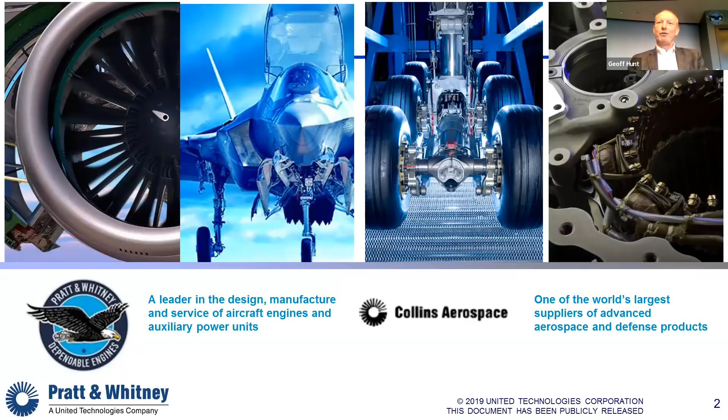Pratt & Whitney and the newly formed Collins Aerospace are the aerospace divisions of United Technologies. While Collins is a leader in the supply of airplane systems, Pratt & Whitney has been in the business of aerospace propulsion for the past 93 years. Within our military engine business, we design and manufacture high thrust-to-weight engines for aircraft such as the F-15, F-16, F-22, and of course the F-135 engine for the Joint Strike Fighter. In our commercial engine business, we power many of the large commercial aircraft that you might fly on today, and in the past decade we revolutionized commercial flight with our geared turbofan series of engines, which I'll touch on more later. Finally, our Pratt & Whitney Canada business powers many of the general aviation and business aircraft in service today, with engines such as the PT6, the gold standard for turboprop engines under 2,000 horsepower.

Before I get into my talk, I'd like to show you a short video by way of introduction to Pratt & Whitney.

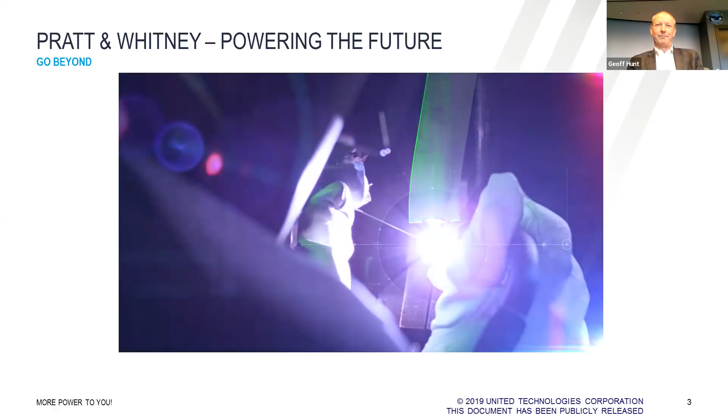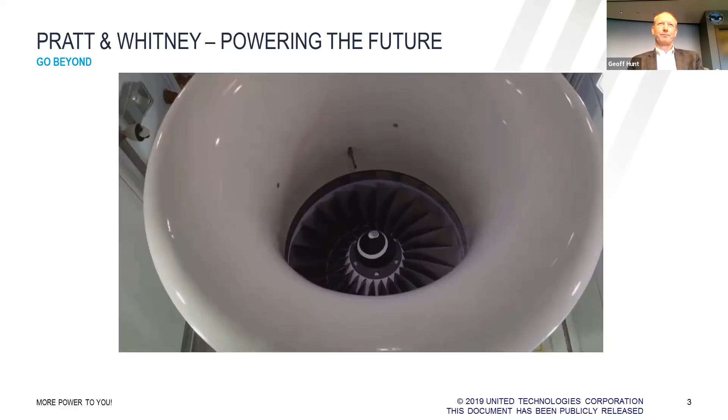For human progress. An instrument to rise above boundaries, connect people, grow economies, and protect the world. Together with our partners, we work with an explorer's heart and a perfectionist's grit to advance it. The magnitude of flight both humbles and motivates us. It demands vision and relentless attention to detail, requires dependable teams that deliver the highest quality products and services, and empowered people willing to do the right thing in the best interest of our customers. Every day, we rise to that challenge with state-of-the-art engines that carry people reliably to their destinations, service experts who provide the care and intelligence to keep planes flying, and generations of innovators working together to transform aviation. We love what we do because we believe flight unleashes the world to go beyond.

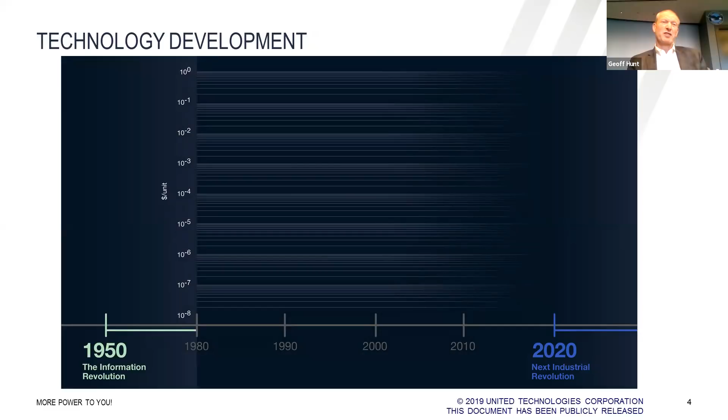Before I get into the details of propulsion development, let's look at it in the context of technology as a whole. First, let's look at some technology curves. What you have here is a log-linear plot with a logarithmic y-axis on the left and a linear time axis. So these curves will look linear, but are actually exponential technology curves.

Let's look at jet engines first. On the time scale that we have here, it's basically flat. One way to describe the slope of these curves is through doubling times.

Now let's look at some other mechanical type products. Rooftop HVAC units, a little steeper but also pretty flat, have a cost performance doubling time of around 25 to 30 years. Shifting products again, for elevator coated steel belts, we're looking at 15 to 20 years doubling time for the tech curve.

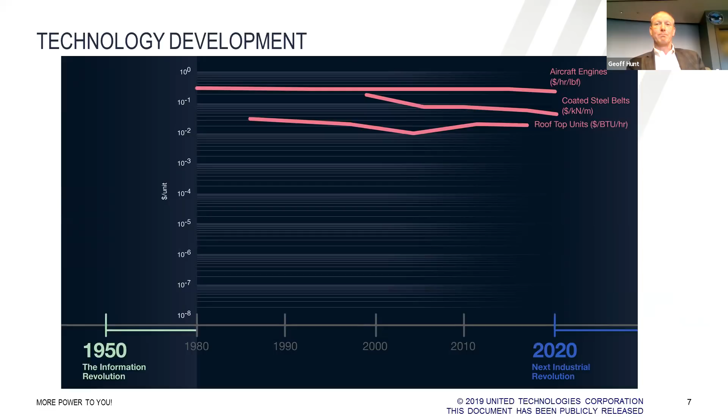So the bottom line is that these mechanically based technologies are relatively slow moving, driven mainly by improvements in materials. Increasingly, however, we see the intersection of these mechanical technologies with a landscape that is much, much faster moving. Digital technologies, and these are all hardware, not software, all evolve at approximately the pace set out by the famous Moore's law, a doubling time of every 18 to 24 months.

Electrical technologies are also interesting. I think these are also fairly slow in their pace of evolution. Recently, however, there's been a huge influx of investment from consumer devices and automotive into electrical technologies, and so the doubling time for battery technology is around 5 years.

And lastly, if you look at some of the advanced manufacturing technologies like additive and synthetic biology, while slower than their digital counterparts, they're still faster than what we are used to in the propulsion space. I'll come back to talk about how some of these intersections are disrupting our industry, but first let's go back in time and look at some of the key disruptors over the past century.

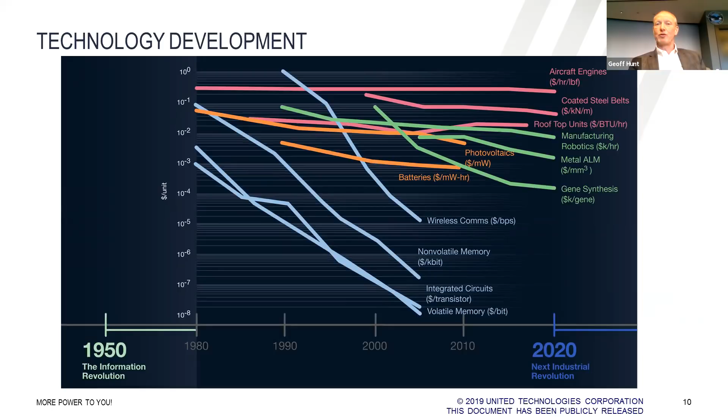Disruption is not new to our industry. The propulsion business 100 years ago was largely based on water-cooled radial engines at about 300 shaft horsepower. As we moved into the 20s, we saw engines such as the Pratt Whitney Wasp introduce air cooling to the radial piston engine, enabling a step change in thrust-to-weight ratio.

The variable pitch propeller was a concept that many had studied since the first airships, but it was developments in hydraulic actuation that made it practical in the 1930s, dramatically changing the takeoff and climb characteristics of engines. The jet engine, in development in the 1930s, was first introduced in the 40s in aircraft such as the Messerschmitt 262 and the Gloster Meteor, and again enabled a whole new approach to aircraft design in terms of speed and range.

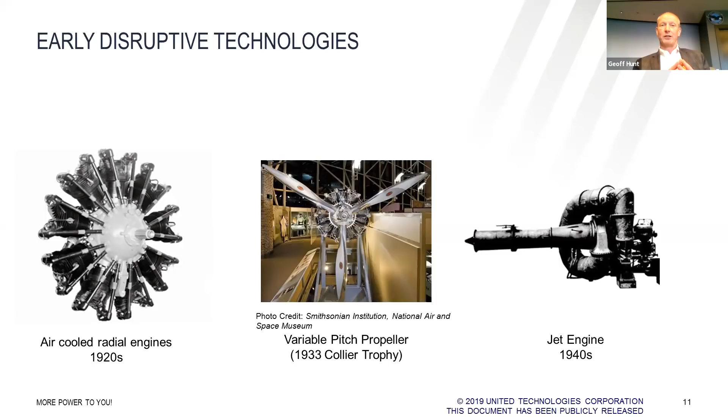Picking up from the evolution or the introduction of the jet engine, this chart shows how technology subsequently progressed within the large commercial engine market. Picking up from that pre-war single shaft jet engine, you see we have the ability to step up gas turbine efficiency by about 10% every decade or two, with step changes in engine architecture, and then periods of incremental improvement in between.

In the 1960s, we saw the wide application of dual spool jet engines like the J57, allowing a more efficient way to achieve higher operating pressure ratios. Then in the 1970s, structural, aerodynamic, and materials breakthroughs led to the high bypass ratio engines that powered wide-body aircraft such as the 747 and Lockheed TriStar.

And more recently still, we've seen bypass ratio double from 6-to-1 to 12-to-1, bypass ratio being the ratio of the fan to the core of an engine, again driving tremendous efficiency improvements. It all amounts to that doubling in technology in half a century.

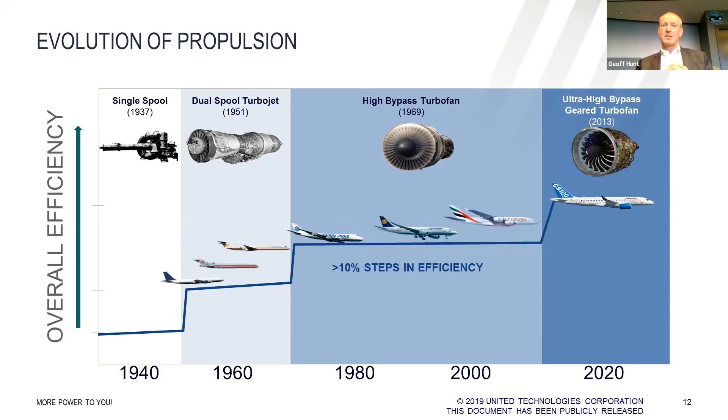We define the aero propulsion market to include commercial and military aircraft, helicopters, business and regional aviation, agriculture and general aviation, UAVs, auxiliary power units, and a range of turboprop applications. And of course, today we look increasingly at the personal taxi space.

The design drivers associated with these applications vary considerably. I make this point to emphasize the importance of really understanding the mission and market demands that must guide your thinking in the selection and development of propulsion architectures and the wide range of areas where disruption can play out.

For example, looking at a sample list of design drivers, a military jet will demand high thrust-to-weight, high operating pressure ratio, and low observability. Whereas a large commercial engine might put priority on fuel burn, noise, and emissions. And a short-haul commercial aircraft will live or die based on the reliability with which it can hit its turnaround windows. Of course, in all cases, safety and cost are critical, but how that is achieved for a given duty cycle may vary.

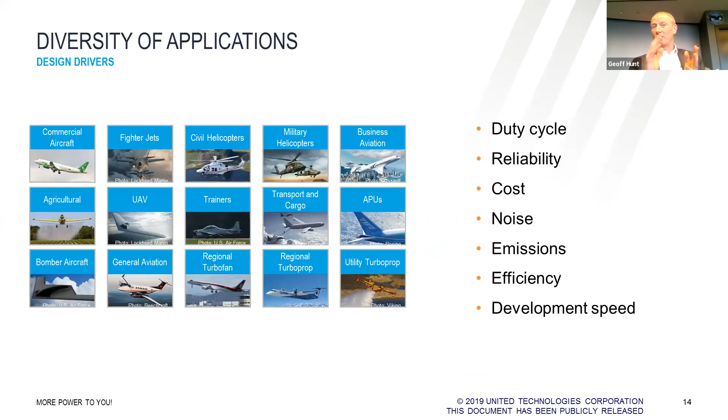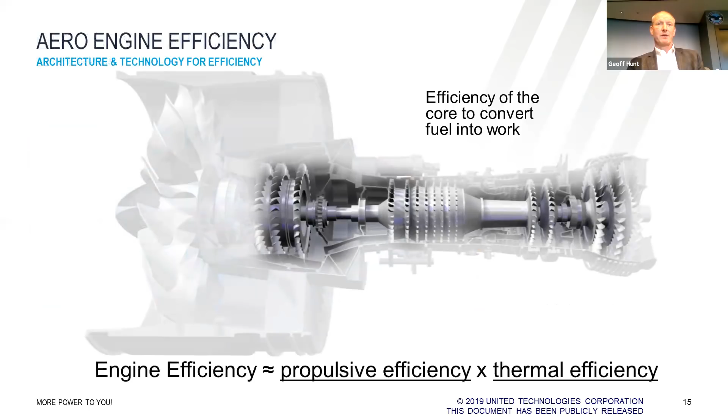So let's dig in a little bit to how we go after some of these design drivers with our technology planning, starting with efficiency. When it comes to engines, there are two areas in which we focus: thermal efficiency, the efficiency with which we convert the energy in fuel into useful work, and propulsive efficiency, the efficiency with which we use that work to produce thrust.

Over recent decades, much of the focus in the area of propulsive efficiency has been around fan aerodynamics and increasing bypass ratio. But the most recent commercial engines from Pratt Whitney have seen a significant improvement in this area through the introduction of a gear between the fan and the turbine, the so-called geared turbofan.

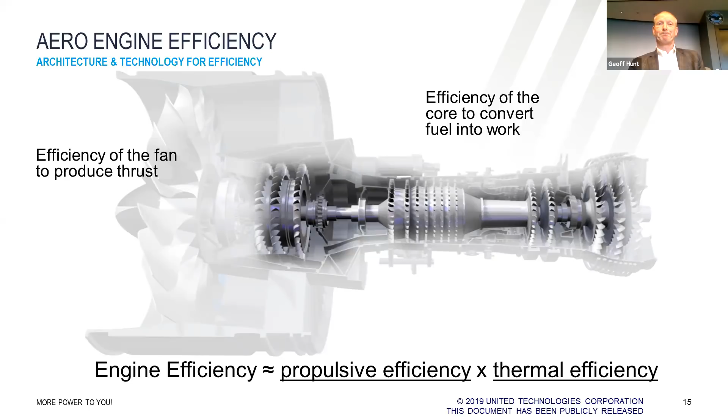Pratt Whitney invested billions of dollars in the development of this technology, which changes the architecture of a conventional turbofan engine by introducing this gear between the low-pressure turbine and the fan. In a conventional engine, the turbine drives the fan on a common shaft, and so they, by definition, rotate at the same speed. However, for optimum efficiency, the fan will typically want to run slower than the turbine, and so by introducing a gear, you can rebalance the core and achieve much higher efficiency levels.

This is easier said than done, hence the investment levels, but the prize is huge. As you can see from the chart, over the past decade, we've seen improvements of 16% of fuel burn, and I can tell you from experience, if you go back over my experience in this industry, in 30 years, we would eke out 2%, 3%, 4% would be a tremendous achievement. 16% is truly revolutionary here.

Dramatic reductions in carbon dioxide and NOx, footprint for noise reduced by over 70%, and as you'll see, 1.5 million annual cost savings per aircraft, and that's a combination of lower maintenance costs and the fuel burn that's involved.

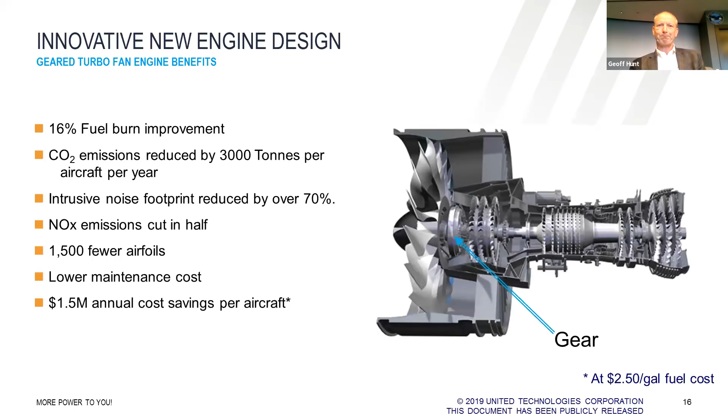So as I said, the other part of the equation is thermal efficiency, which largely comes down to how high a pressure ratio you can drive through the core. Driving pressure ratios in the core of the order of 30:1 within an acceptable core package is a challenge aerodynamically, structurally, and thermally.

But it's in the development of materials, design, and cooling systems to handle this challenge that demands real technology development. As illustrated here, we're talking about temperatures sufficient to melt rock or steel and loads equivalent to hanging an airplane off a single blade. And as we drive for ever improved thermal efficiency, these challenges go up.

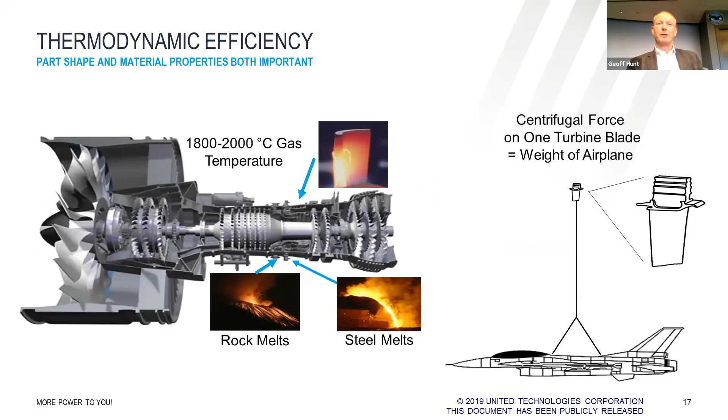You could look at the challenge as the application of three levers: development of ever more capable materials, the process through which those materials are produced, and the design of the cooling systems and coatings to provide additional capability.

This chart gives some insight into how we think about materials. The first jet engines ran at a peak temperature of around 1200 degrees Fahrenheit. They had aluminum alloy compressors and stainless steel turbines. The development of nickel alloys allowed temperatures to increase, and a series of important breakthroughs have pushed today's engines up into the 1800-2000 Celsius range.

You'll see in the center of this graphic how the nickel alloy section moves from forgings to castings and starts to neck down towards the higher temperature ranges. And this has been achieved by these progressive improvements, things like managing the grain characteristics of the alloys through directional solidification, and then single crystal materials to ensure capability. Cooling schemes, including ever more sophisticated film cooling, increase capability further. And then the application of thermal barrier coatings gets you to the very highest temperature capabilities with that type of material.

The latest developments, which are moving the state of the art into a whole new arena, is the application of ceramic matrix composites for the highest temperature areas of the engines. You can see from the curve that this is really getting you into this whole new space.

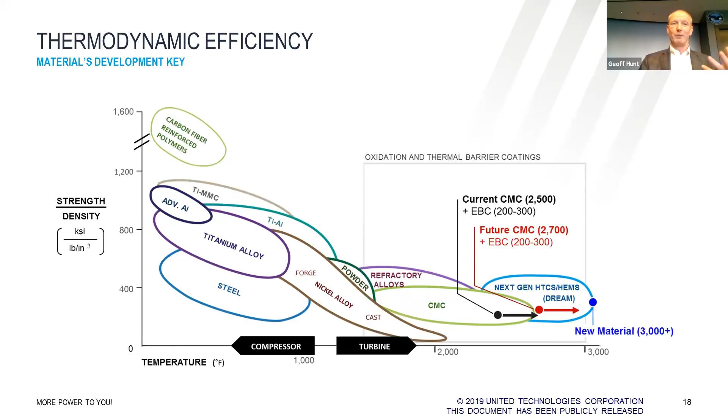So that's efficiency, propulsive efficiency, thermodynamic efficiency, and we're seeing progressive evolution followed by steps of disruption as we introduce new mechanical and thermodynamic concepts.

Shifting now a little bit to cost and speed. It almost goes without saying that cost and development speed are key drivers in our industry. And while there are many levers that one can look to, the rapidly evolving field of additive manufacturing presents some of the more interesting opportunities.

One thinks about this in a number of different ways. Early applications have used the ability to iterate quickly to greatly accelerate development cycles. But the opportunity to minimize buy-to-fly ratios, the ratio of raw material to the actual material in the finished product, and the ability to combine functionality or simplify manufacturing processes in areas like complex brazing all mean that this will continue to challenge the norms of manufacturing in the industry.

Early wins include things like fuel nozzles.

These traditionally have been constructed through a complex brazing process that involves multiple cooling and heating cycles to put together a Russian doll-like assembly to create complex flow passages. An additive approach can greatly reduce the time to construct such a structure while assuring tighter process control and quality signature.

In fact, it's amazing how much of our current design thinking is constrained by the capability of traditional manufacturing methods. For example, in the last few years, I had cause to review some interesting challenges related to cavitation in gear pumps. As we dug into the subject, it became evident that much of our design systems and tools were based on the capabilities of gear cutting machines at the time.

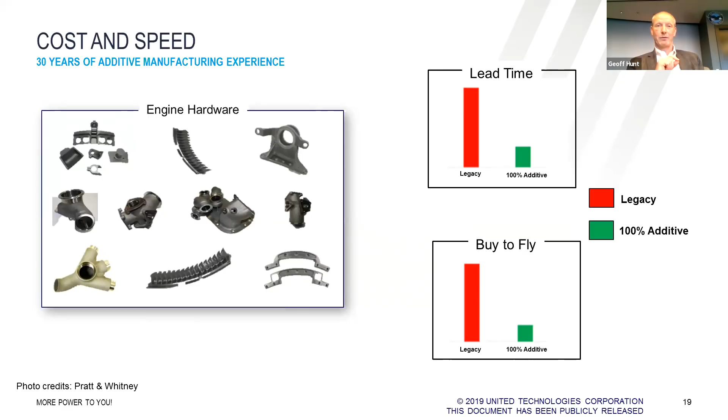Finally, I wanted to touch on reliability and safety, a non-negotiable in the development of a propulsion system. There have been several discussions on this topic over the course of the GoFly lectures, and while I don't propose to go deeply into the topic here, a talk on propulsion would not be complete without some reference to the particular challenges that an engine faces in this space.

Clearly, the loss of thrust due to an engine failure has to be considered within the course of the design process. Redundancy in the airframe and engine architecture is a key mitigation, either through the sharing of work across multiple engines or through redundancy of systems and monitoring of health at the engine level.

Detailed analysis of the system's safety and failure modes and effects is critical, which will drive the measures required, including not just design, but the level of manufacturing and quality control of critical parts.

60 minutes in the early 1980s to as much as 370 minutes today. This is enabled by a tremendous improvement in engine reliability.

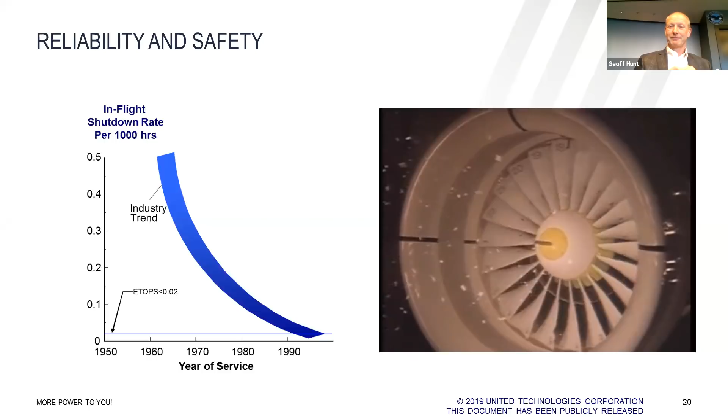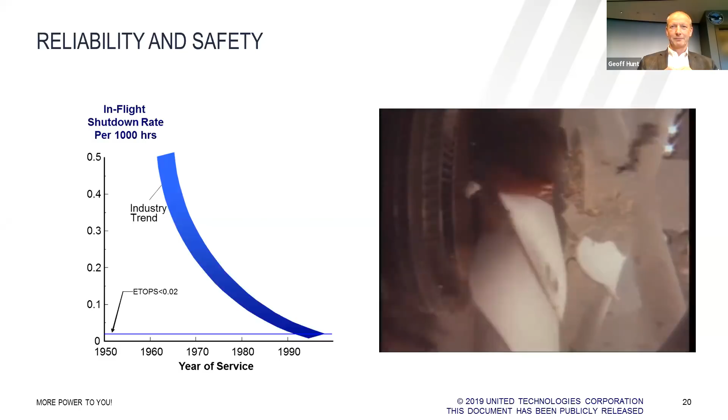So, whatever the mission for an aircraft, the levels of safety and reliability within the propulsion system must be at least as good as what has come before. And these are extraordinarily high levels in the industry today.

So, I've looked at some of the drivers of propulsion system design to date, and certainly these will continue to be critical as we move forward. But there are plenty of other factors. And given time constraints, I haven't, for example, touched on how the latest developments in data, connectivity, and model-based systems engineering, for example, continue to instruct our thinking.

But for now, I'd like to turn to a more disruptive opportunity that presents itself today, namely electric propulsion. Much has been published in this area of late, and there is not time in this lecture to dig deeply into the topic, but a few thoughts.

So what's important to note here is that only goose fat and Jet A are in wide use today as fuel to power flight.

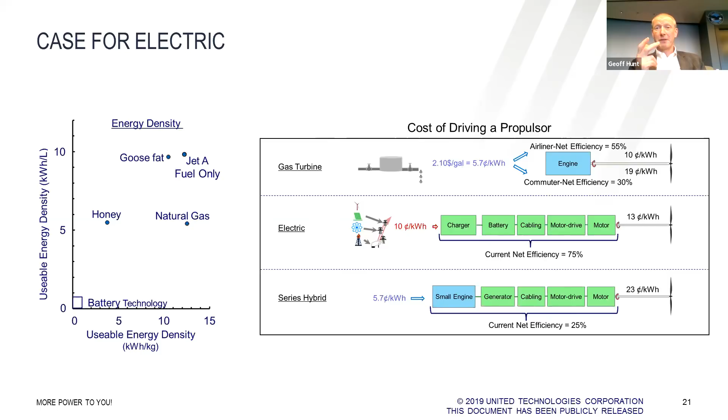Now, if you switch to electric, the raw cost of electricity may be higher. I live in Connecticut, where we pay around 20 cents a kilowatt hour today. But if you go to the bottom of the range around the country, let's assume you can get electricity at 10 cents a kilowatt hour. With a 75% efficient electric powertrain, your cost per unit work is going to be about 13 cents a kilowatt hour. So better than a turboprop, not quite as good as an airliner engine.

Finally, we might look at a series hybrid where you try to overcome the challenge of that battery storage by burning fuel in a thermal engine to make electricity to drive an electric motor. In some regards, we see this as the worst of both worlds, as you carry the lower efficiency and weight of the thermal engine in addition to the electric system. On just an efficiency basis, it trades poorly in our view.

Of course, as commodity prices vary, this overall calculus moves around. Today, Jet A is actually closer to $5 a gallon, which will clearly make the electric option more attractive, assuming you can overcome that troublesome energy density issue.

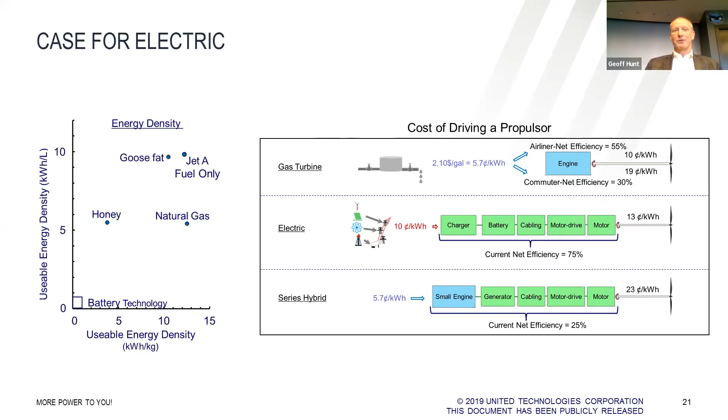So how does this look when you lay it on top of a number of aerospace segments? On the smaller end of the market, particularly in the regime of the go-fly competition, the economic benefit of electric power at about the 0.5 megawatt level perhaps, and below, may trade favorably in a package that's practical, even rising to a larger 4 to 6 passenger craft, which may be closer to the megawatt sort of level of demand, could be interesting.

However, above that, foreseeable battery technology starts to become problematic, which is why you start to see the series turbo electric systems enter the discussion, in a range of maybe up to 4 megawatts or so at the maximum end. For us as a large engine manufacturer, of more interest here is the opportunities that might be afforded by a parallel hybrid architecture.

In this case, an electric motor provides supplemental power to a gas turbine as the prime mover. The level of power required in such a case could vary widely depending on the duty cycle, but this is an area where a sibling company, Collins Aerospace, has a strong capability, so we're studying a range of potential architectures with them.

To give you a flavor for that, in its simplest form, one might consider the case of just adding an electric motor to the low-pressure spool of a traditional gas turbine. In such a case, you could use the motor to supplement power at the top end, allowing the engine to run cooler and extend life. Or perhaps you could size the engine to deliver power at a design point and use the motor to supplement for takeoff and climb, thus delivering a cost and weight benefit.

A step beyond this would be to put motors onto both the high pressure and low pressure spools. It's a very interesting concept that would allow one to use the motors to not only supplement power, but also to manage the operability of the engine.

Today's gas turbines have shafts that are thermodynamically coupled, meaning that they follow each other by virtue of the pressures and temperatures in the system. This typically requires bleed valves and variable geometry to run the compressors at an acceptable operating condition. If one can use the motors to manage the shafts to a particular speed, you may be able to dispense with the cost, weight and complexity of these ancillary systems and have a much more responsive motor.

Finally, as you continue to extend this line of thinking, you start to look across the overall airplane system and ask questions about the full system architecture. Which of today's backup systems may become obsolete in such an architecture? How would power sharing work at the aircraft level? We're in the early days of these studies, but surely there's more to come in this space.

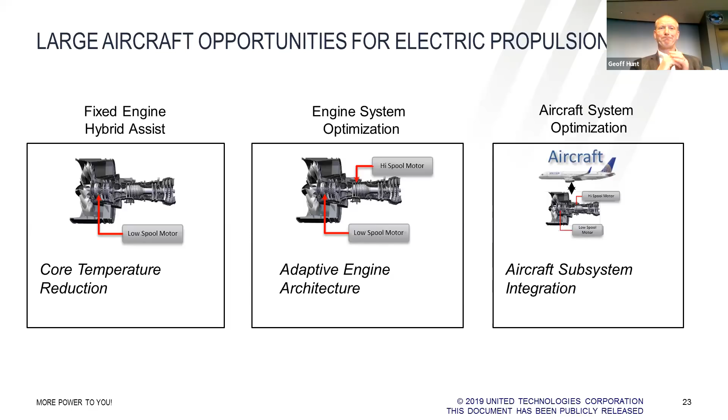I hope this brief tour of the evolution of propulsion has been of interest. Clearly, there are many critical technologies that I haven't touched in this talk, and I apologize to the innovators and engineers in those fields. I started by highlighting the traditionally slow pace of technology development in the jet engine world, paced largely by thermodynamics and materials.

But while this is true in aggregate, in detail it's made up of a series of radical ideas interspersed by years of incremental evolution. It's a highly technical field that requires a robust constitution in order to place those bets that enable step changes in performance, like the geared turbofan. But these changes are critical to achieving the ever higher standards of efficiency, emissions, noise, cost, and time to market that our customers demand.

So as we look to the future, Pratt Whitney is proud to be the sponsor of the Disruptor Award for the Go Fly competition. We're looking for that idea that's truly original, innovative, and groundbreaking that might be the next rung on the ladder. I look forward to seeing how this develops, and more power to you. Thank you for your attention.